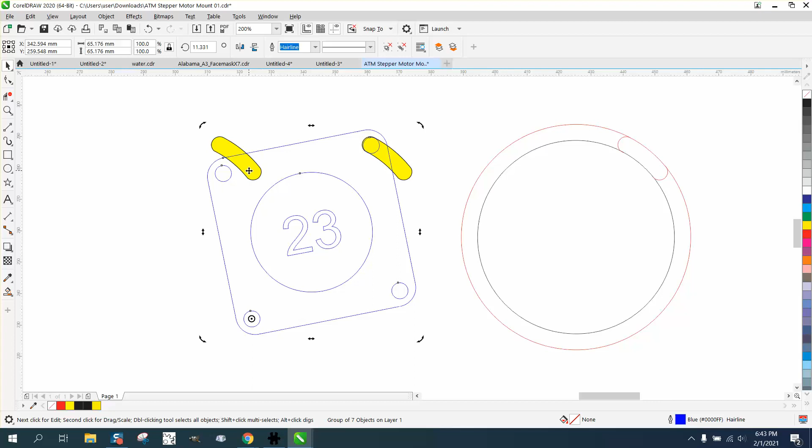but it doesn't matter right now. So we're going to double click and we're going to... okay, what I'm going to have to do is fill in that circle with the blue and then group this together, Control G.

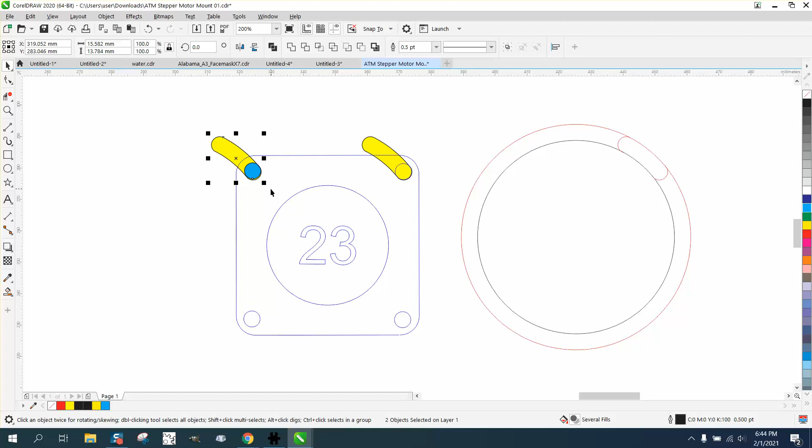Now rotate this guy, whoop, too far, like right there. And because this is grouped, I ought to be able to move the rotation, and we're a little bit off. I ought to be able to move the rotation to the center of that blue.

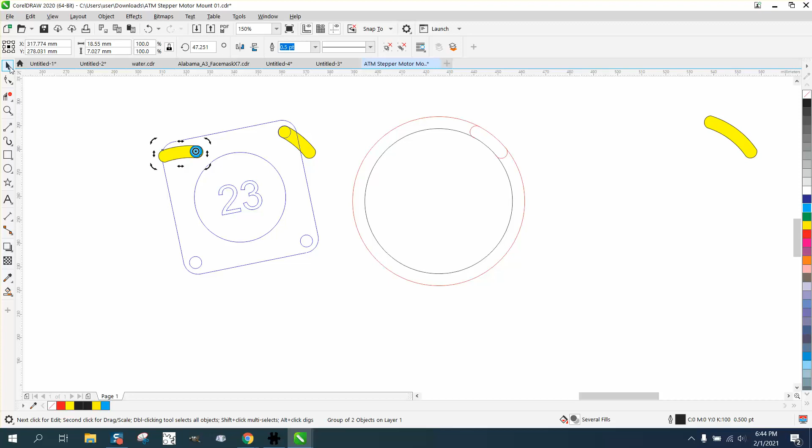And then we can rotate this guy. And this is where I'd have some slop. So let's see if my idea worked now. Tell you what, I like that blue color.

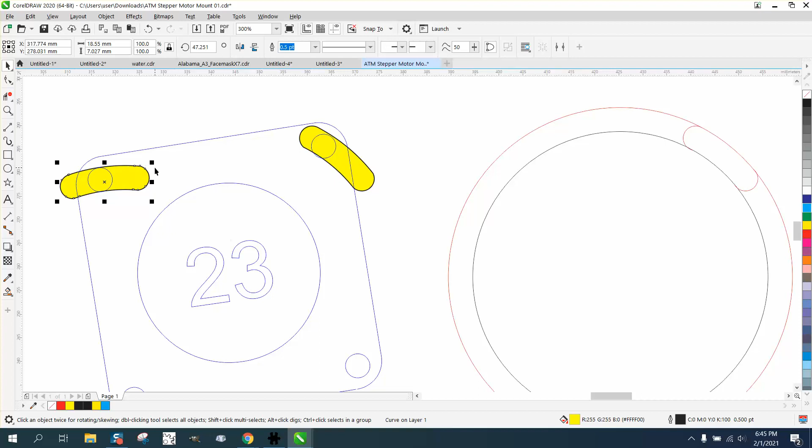Let's ungroup this for a second. The bolt hole, well, let's go object, order, back of page, and there's our bolt hole. So let's make it... for just a second, I'm gonna have to nudge this out of the way and nudge this out of the way. And then we're gonna make our bolt holes a blue.

Let's make them red. Now let's nudge these 2 parts back. It's kind of funny how they look like they would kind of be the same.

Now we can take this and rotate it, and watch the reds didn't move. But you get the idea that this one's actually going to move more, so that you've got a lot more room. But as I said before to the gentleman, I would put in some slop

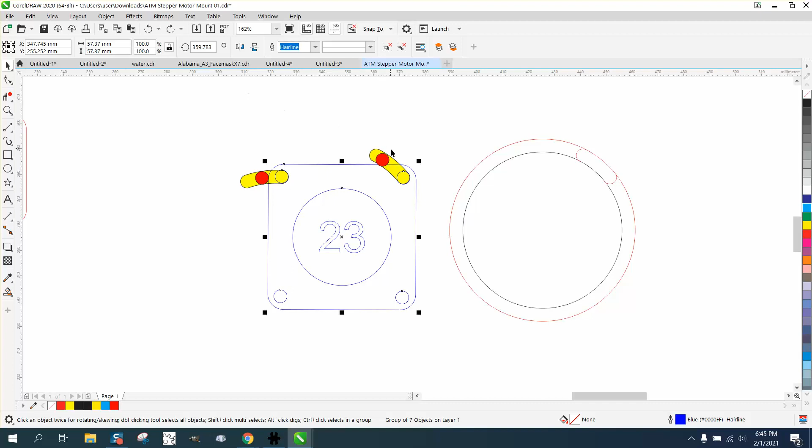just to make sure you're right. And test it out on a piece of scrap plywood and just do the same thing down here.